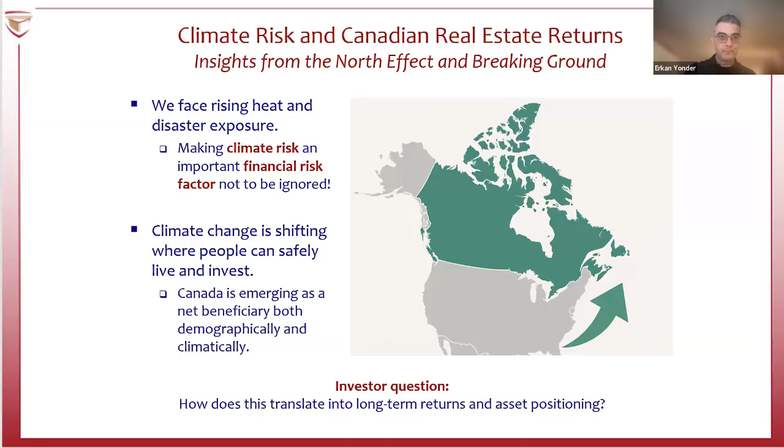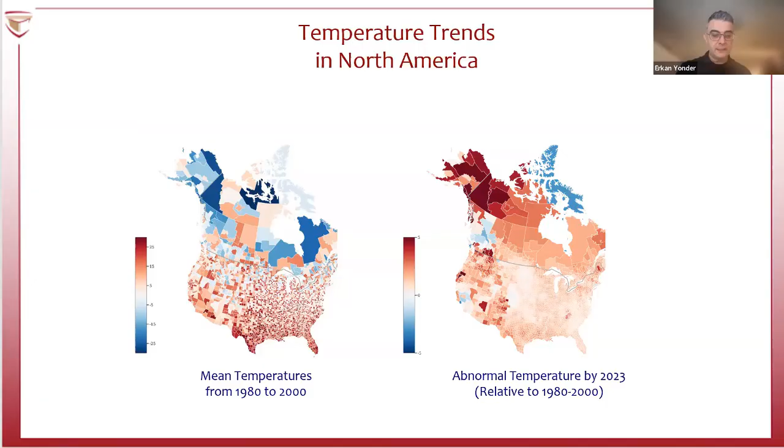So we see heating, and I've shown a couple of figures on how we see it. Let's discuss how this heating relates to more high-frequency disasters like flooding, hurricanes, wildfires, and so on. The important question for investors is whether we see any financial impact of these more frequent disasters.

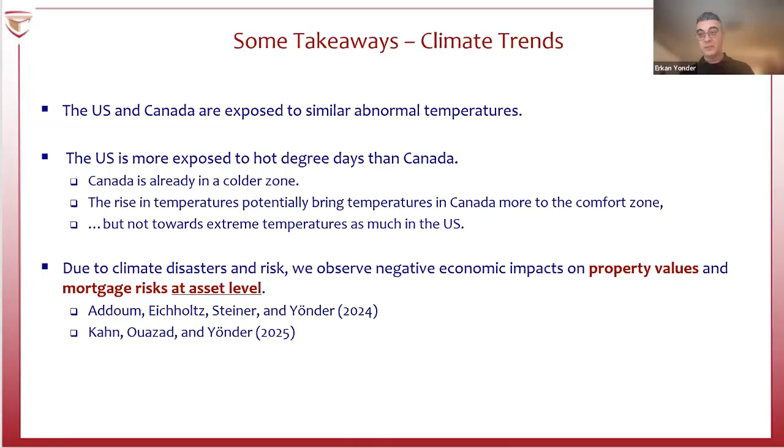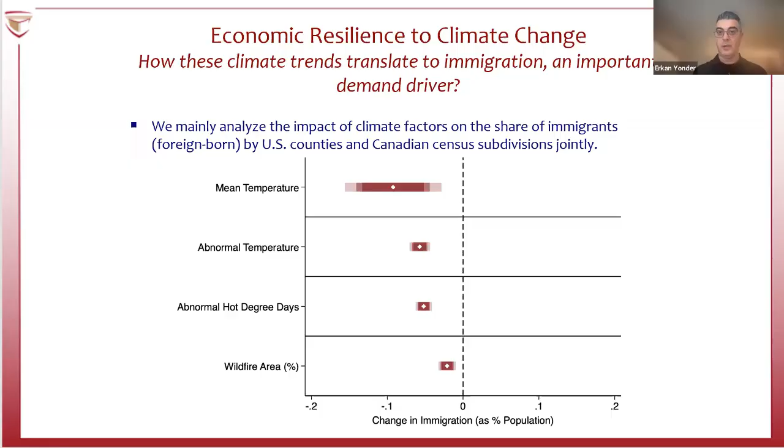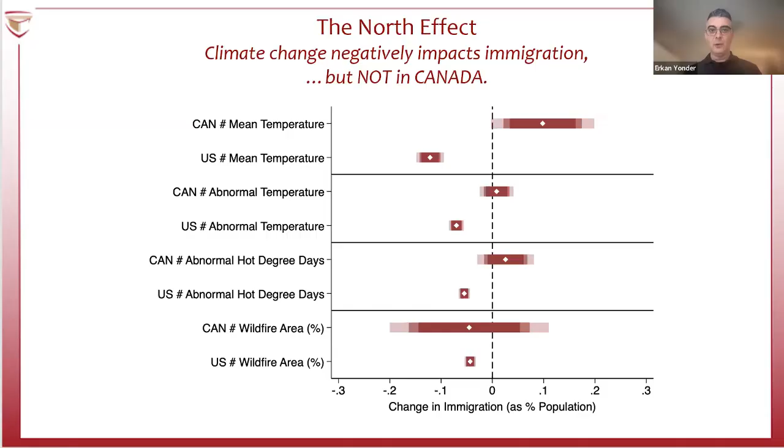But if you look at the Canadian bars, mean temperature is actually on the positive side, meaning that even heating kind of helps Canada attract more immigrants. And if you look at abnormal temperatures, hot degree days, or wildfire, they all cross the zero line, meaning these climate factors don't have any statistically or economically significant impact on immigration to Canada. So overall, climate change negatively impacts immigration, but not in Canada - we call this the North effect. So why do we observe this?

So why do we observe this? Overall, Canada has colder temperatures. We live in a colder climate environment. So the heating up in Canada brings those temperatures to more comfortable levels, kind of a North effect. If you look at the US map I first showed you, the US has lots of high temperature locations, and heating in those locations brings the temperatures to even more uncomfortable levels. So that brings in the impact.

Additionally, if you observe more heating and go to the extreme temperatures, there's a higher frequency of disasters like wildfires, flooding, hurricanes, and so on.

So if I translate these findings into where we should invest in Canada based on these findings: first things first, major metro areas like Toronto, Vancouver, and Montreal will continue to attract population and capital. There is no change with respect to climate. These locations are highly popular among immigrants, attracting immigrants from all over the world, and overall we don't expect any change. So this demand or climate won't negatively impact these locations' immigration, and the demand will remain stable.

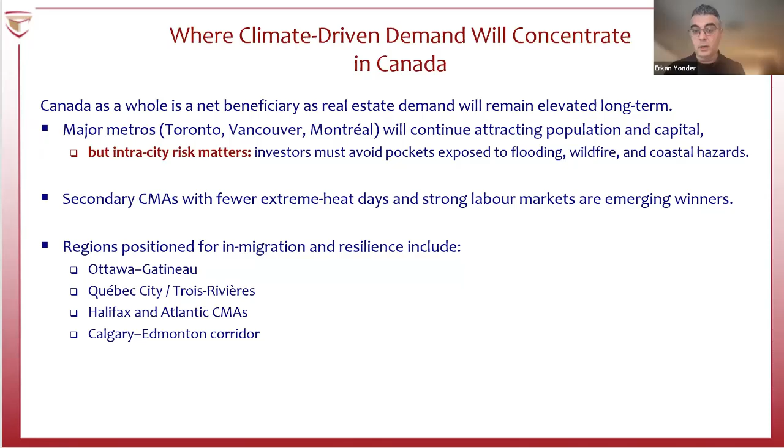And if you look at the economic part, all of the bars are on the left side, meaning Canada is also attracting immigrants from lower GDP countries. So combining these two findings, Canada attracts both climate immigrants and economic immigrants. This is really important because it represents economic resilience of the Canadian economy to climate change, and it's really important that Canada continues to have this advantage.

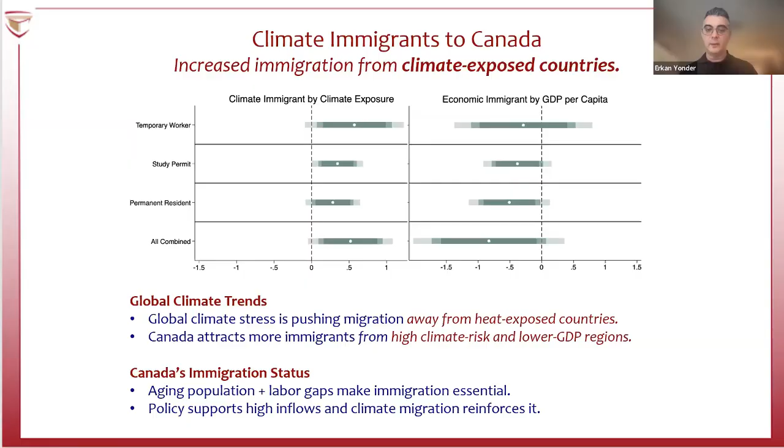But right now we see a different story in Canada's real estate markets, right? I think you might have questions about it. I made another presentation last week on this to some investors as well. Overall, the current structure shows declining GDP, rising unemployment rates, and the government paused immigration—I'll show you a figure of government projections. This has impacted real estate prices in Canada currently, so I think we shouldn't read the climate results independent of what's going on currently.

Next slide, please. I'll show you what's going on right now in Canada. This is the government's projections.

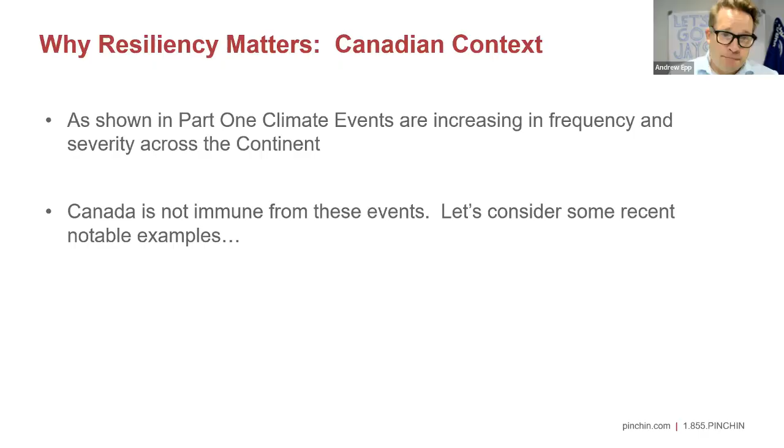This was 12 years ago. Rainfall of 126 millimeters over one day. Massive flooding, massive damage to infrastructure. We're talking closure of one major thoroughfare, transit systems down. That's the importance here. So, preventable—we'll talk. Next slide, please, Aaron.

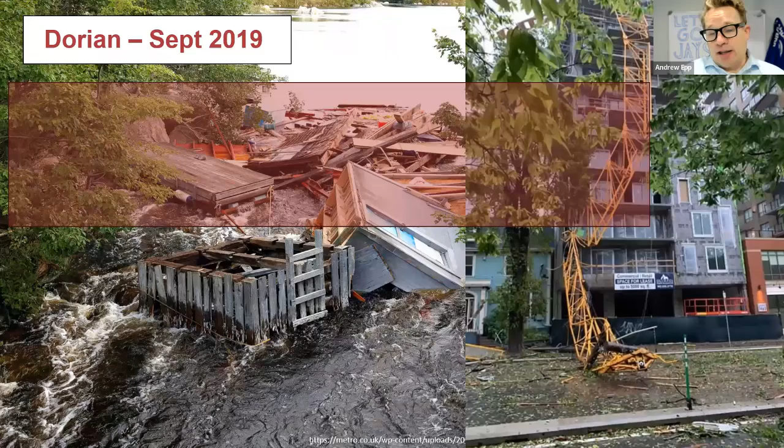Dorian, massive storm that impacted Atlantic Canada in 2019. Very strong winds, 100 millimeters of rain. Power outages—80% of Nova Scotia without power for over 2 days. $155 million of insurance claims in Atlantic Canada. Important note: insurance claims are not the total cost of the storm, only what people have gone after. My colleague, Mr. Runkle, will explain more about that shortly.

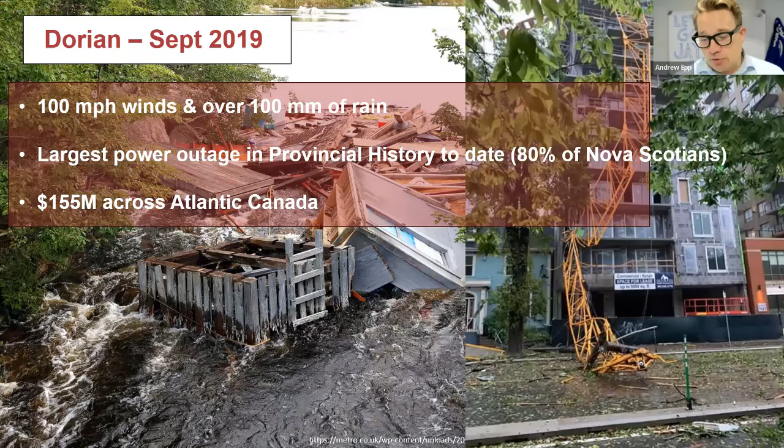So, ice storm was last year. Next slide, please, Aaron—a different type of event. And if you are a vintage like me, you'll remember the ice storm from 1998 in Eastern Ontario that plunged us into the cold for 5 days.

Next slide. Why does all this matter? All of these storms were meant to take you backwards, to remind you of the damage, the stress, the anxiety, the unpreparedness we had. These events are not getting fewer—we're actually expecting more of them. So while they are growing, so was our opportunity to lead in this space, as a country and as people within this industry.

Resiliency planning is no longer an option. It's essential for protection of your assets and the people in your care. We're going to skip that next question and go to the next slide—the resiliency versus sustainability slide, please, Aaron. And I'm going to pass it over to John Runkle to continue on.

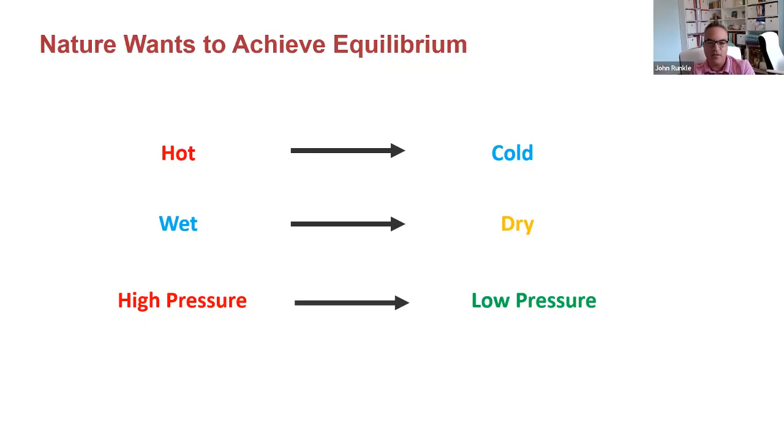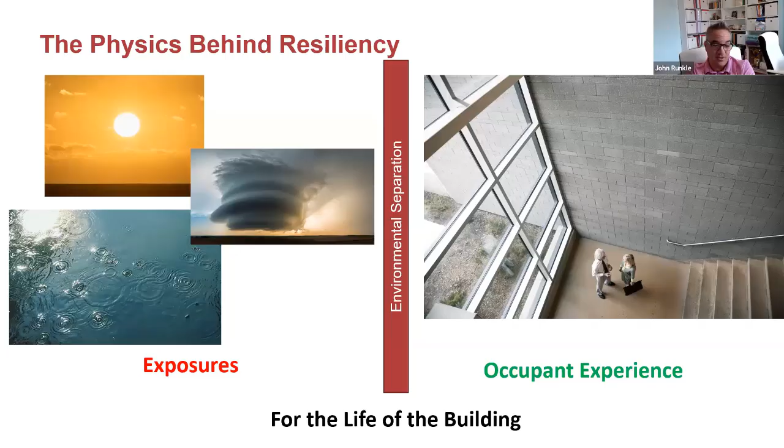So we put in walls and buildings and so forth to try to keep outside out and inside in. What we're finding too is that our occupants today are even more particular than in the past. I like to say that most folks have 1 degree of comfort level inside a building, and at any one time someone's always too hot and too cold. Next slide, please.

Andrew touched on this before, but we're going to talk a little bit about the difference between resiliency and sustainability. I think the one thing that's important to note is that sometimes, especially in the States, these can be political type terms. And I can tell you that natural disasters don't care how you vote. It will influence your property, it will influence your ability to live the life you want to live, regardless of how you vote.

When we look at resiliency, it's really focused on preparedness, recovery, and adaptation, whereas sustainability is more looking at the future and how to improve long term, given certain environmental targets and so forth. So simply put, the difference is while sustainability focuses on creating a positive future state, resiliency is kind of the pessimistic side of that—focusing on the inevitable disruption.

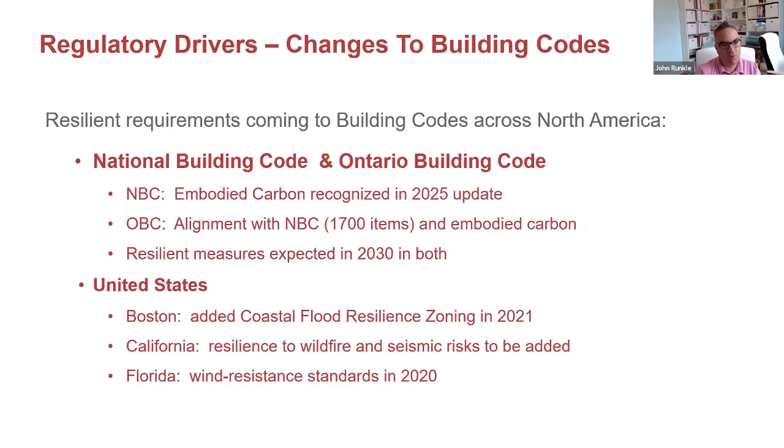In the United States, we've seen this across the states in areas hit hardest. A lot of times changes to building codes are influenced directly by natural disasters—we see that in California with fires and correspondingly Florida with wind. I'd say the biggest influence on our codes is natural disasters and responses to them, based on poor performance of existing buildings.

Focusing more on the dollar side of things, what we're really looking at is asset value retention. There are different costs—we'll talk about insurance in the next slide—but you can have uncovered losses, and you want to avoid climate-driven devaluation. We started to see some influence of climate change on property values in the first part of this presentation.

Now we'll look at how it can influence things after you've sustained an event. With regulatory compliance, local communities that have been hit may have additional regulations that cost real money to bring existing buildings up to compliance or prevent future losses. One of the biggest costs that's hardly talked about is the value of lost downtime from a facility expected to be producing revenue—instead it becomes a cost center until it's back up and running.

Focusing on the insurance side, which is a large part of our business both north and south of the border, you often see significant increases in premiums if there are multiple events, which can make or break the ability to pay leases—on the residential side, and impacting premiums on the commercial side as well. What we haven't seen yet is a direct linkage to mitigation and the reduction of premiums.

So what's at risk? Ultimately, in a lot of these cases, it's people's lives. It's much more than property or livelihoods, which are also at risk - but the ability to rebuild, business continuity, community and relationships, and just basic functionality. All of these things are at risk with these weather events.

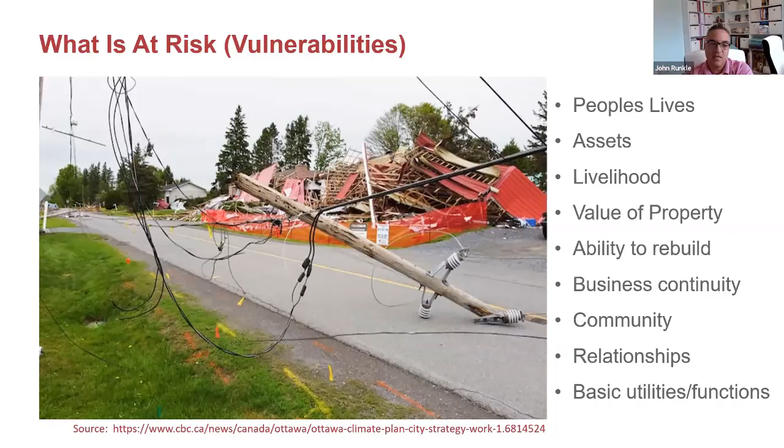One concept that I hope we can let sink in today is the importance of time. I think this was exemplified when you look at some of the fires we had in Hawaii as well as California, and some of the recent flooding too - oftentimes there's very little warning. When you overlay what's at risk with the limited time to prepare and get ready, it can be extremely concerning. The duration of the events is also important.

So how long you have to suffer - the downtime after the event, the downtime until you're fully recovered and back in, and then the amount of time that takes you away from doing the things you'd rather be doing. All these things are very important when it comes to these events and the time that you have.

It's shocking. Other things you don't think about too - when you're in this event, you're fully trying to react and get things done. I will say you're not thinking about taking pictures to document it. In my case, I wasn't thinking about where my car was parked, and by the time I realized it was at risk, I had no choice but to pull it as close to my neighbor's garage as I could, because I couldn't back it up into deeper water.

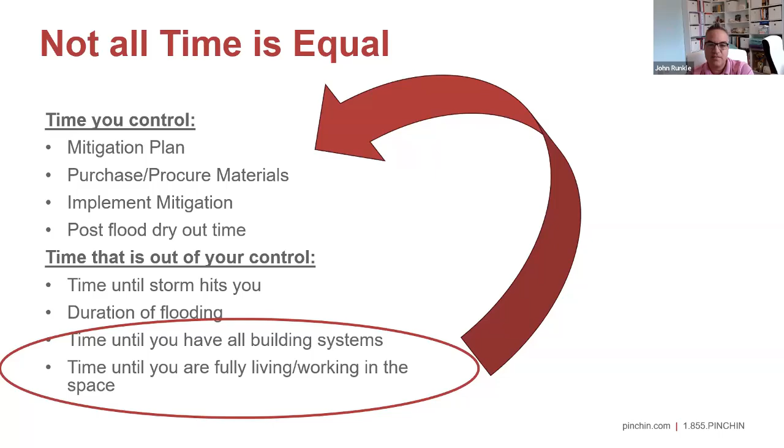We're going to give an example later on of one of the assignments we did that followed this new ASTM standard, ASTM E3429 - a standard guide for property resilience assessment. This is kind of hot off the press, but what this is, is a prescribed procedure to go through and determine not just what the risks are, but what opportunities there are to improve the results or reduce the risk to your property from a resiliency standpoint.

There are lots of tools as you get into this to help identify risk. One of the tools we've used effectively in Canada, and training we've received, is the PIEVC engineering protocol. This is very useful again for identifying risks on a site-by-site and location-based perspective, as well as looking at time - we know that risk exposure can change over time, and we also know that based on geography and other factors, the exposures are very localized in some cases.

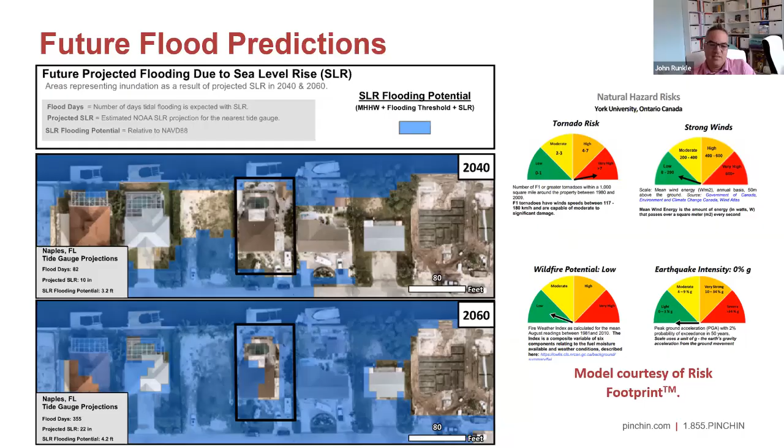When we talk about defining success, that's important. Anytime you have a property at risk, you have to first start with what success is. I think too often we get hung up on the success we see in the media.

One thing to talk about is whether you have insurance or not. But oftentimes when you're filing a claim, that's already failure—by the time you put in a claim, you've already lost, in other words. Things to think about: what are your deductibles, what's your damage, what kind of coverages do you have? A lot of the work we do is wind versus water, and if you only have coverage for one or the other, that could easily affect your financial risk to the loss.

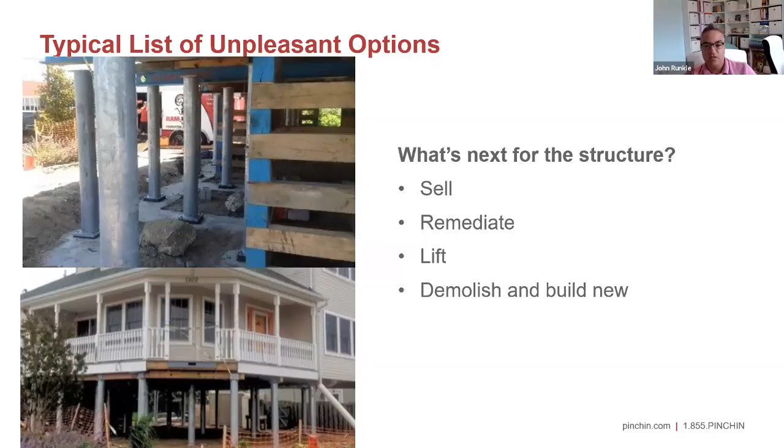If you have a loss, it's typically a whole laundry list of unpleasant options for you. In terms of flooding, which we're going to talk about today, you're either going to sell, do a substantial remediation, elevate your property, or basically demolish it and start over again. None of which are cheap.

So when we look at defining success, what we're trying to do is overlay a couple of different things: how much water is on the outside, how much water is on the inside, and for how long can we fight this fight.

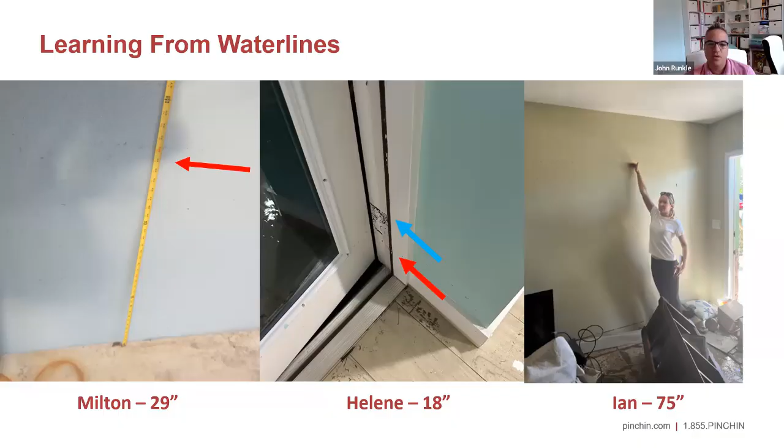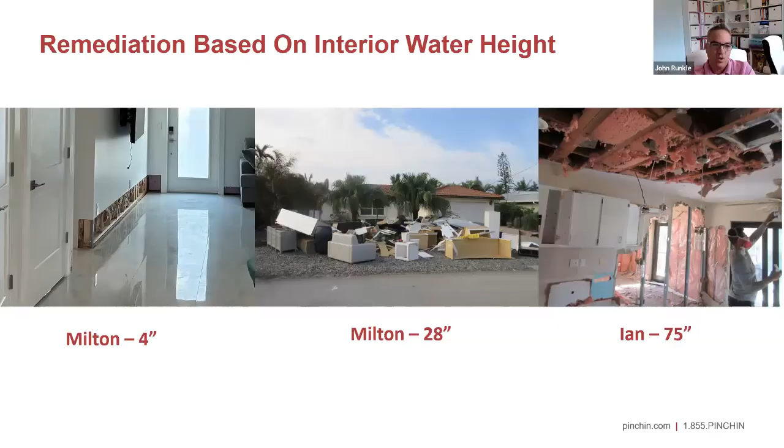This gives you an idea, from a residential standpoint, how much damage you can expect based on the amount of water inside a house. This is in inches, but a couple centimeters of water and you're going to cut out about 30 centimeters of drywall. When you get up to about half a meter, most of your contents, appliances, and your house end up on the front yard. And when you get into the 2 meter range, pretty much, if your house is a single story, it's essentially gone. So what do we do with this information in terms of defining success?

Next slide, I'll turn it back over to Andrew. Thanks, John. All right everyone, so that's been an hour of lots of thought, plans, theory.

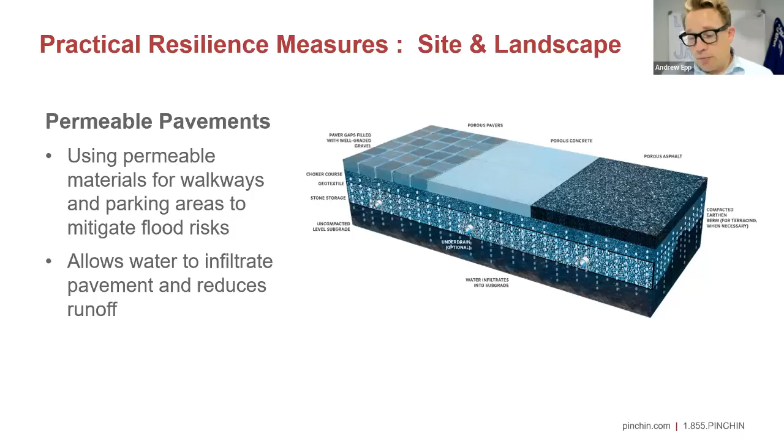You'll see often that these are generally more upfront - obviously this is quite a bit more expensive than a typical repave. However, what we want to do, as John did a really great job explaining, is balance the cost here versus the cost of the flood that we haven't tried to mitigate, or even allowed to happen because we just went with a straight asphalt. Next slide please, Aaron.

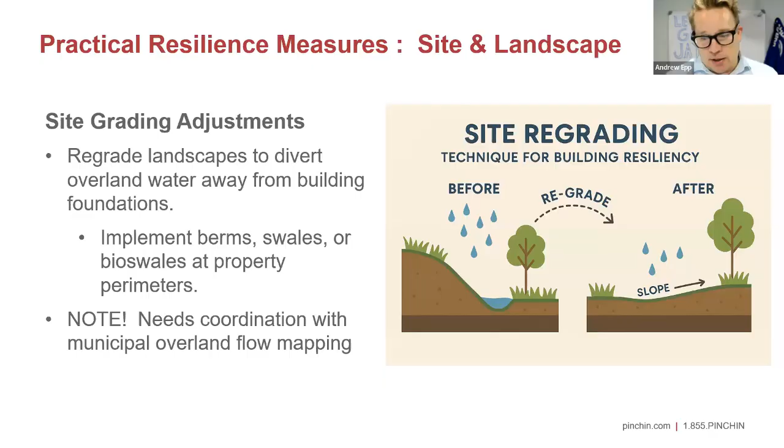If you're going to consider this, it's not massive - it doesn't require a lot of big equipment, but its impact is really quite good. It's very important to consult with the local building department. They certainly have a flooding plan, and you want to participate in that, not contribute to it. Next slide please, so that was some ideas for site grading.

So it is a solid layer, basically like a raincoat around your property.

Sorry, that's not me. Sorry.

So the weeping tile is the same idea. We've got a protective skirt, right? You can see that black layer around the building. And then the water itself, in typical waterproofing, we just allow it to flow to the groundwater. Here, we are directing the water. You can see that pipe right at the bottom, that is the weeping tile. Same idea as a French drain. So we have a tube in the ground, it has holes in it, collects rainwater, and once again, moves that to where we want it, not where we don't want it. Next slide, please, Aaron. Another envelope one.

If you have been in a neighborhood with a flood, or in a community that's had it, this happens often. I'm broadcasting from near Sarnia, Ontario, where we have a neighborhood that has experienced really bad flooding, and this has happened a few times. The storm sewers become overwhelmed with so much rain that the water will push out and come back into someone's home, along with some other rotten things, here depicted as rodents, because this is a polite environment. But the rodents, plural, and all their other bad things come back into your basement, and that is not a good situation. Backflow valves are great for everybody, especially in flood-prone areas like the Don Valley Parkway that I showed you before.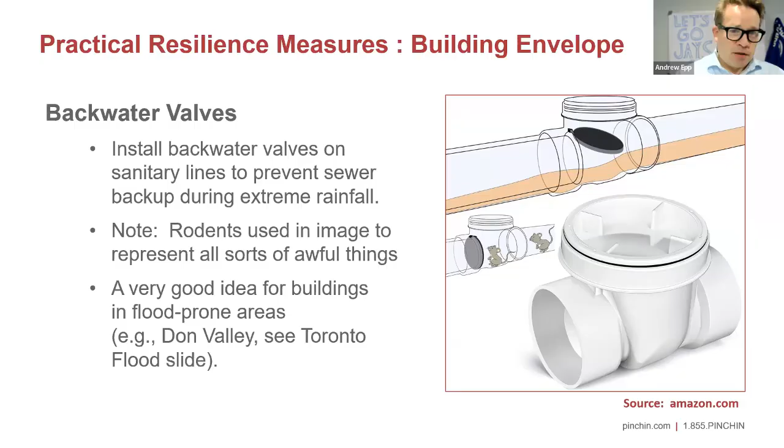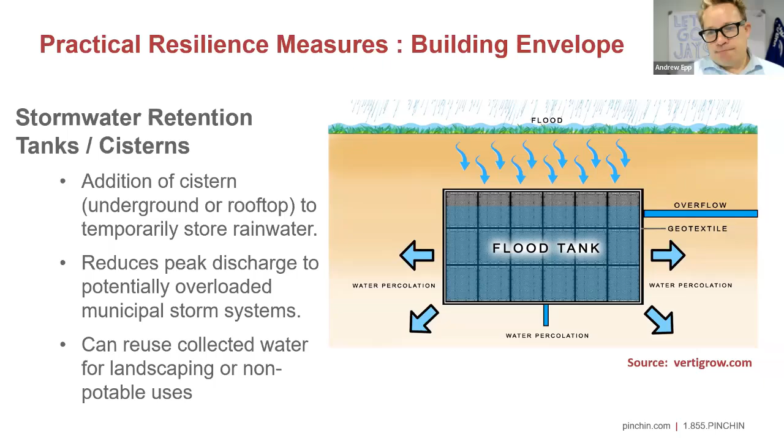Next slide, please. This one's phenomenal. The stormwater retention tank, or what I learned the other day, sometimes called the detention tank. Same idea as the weeping tile, a big tank buried underground to hold the flood water from your property. We're prone to flooding if we're in an area where we can't get it to a sewer line easily. This is just the mid step. So we fill the tank during a storm, and then you can see the tank empties slowly, with I see 1, 2, 3, 5 ways out of that tank. So some to the sewer, and we leach it slowly to the ground, controlled. Next slide, please. Those are some examples.

If we're also looking at, if it is time to do windows or doors or any type of exterior, there's always some things to consider. I think it's probably worthwhile mentioning that every building retrofit absolutely has both a sustainable component and a resilient component. For building envelope retrofits, we probably should ask the technical people involved, if we're doing insulation, what types are available, not just accept one. You don't have to be a building engineer to know this, but ask, what are my options here in terms of cladding and insulation? Should we be focusing on something that's more moisture resistant, considering where we live?

Storm surge and wind resistance enhancements. If we've seen a lot of wind events in our area, there are other building retrofits we can add in to make sure the roof stays put, that rooftop equipment stays put.

Next slide, please, Aaron. Moving into mechanical electrical, this is simpler stuff. These are both photos from John's property in Florida. Real simple, and we all know this: electrical machines, anything with electricity, doesn't work well with water. So what do we do? If we're looking at a mechanical room, if we're in that kind of project where we might be replacing a pump or a motor...

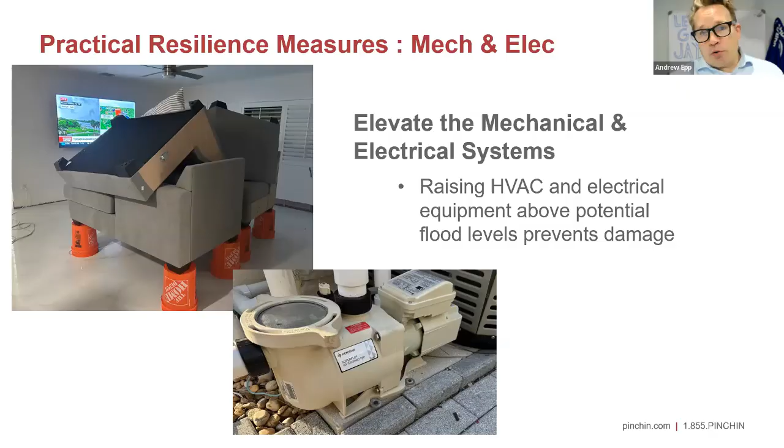Put them on a pad, a housekeeping pad. Not a ton of extra money, a few extra thousand dollars, but raising it off the floor 4 or 5 inches will save it in the event of a flood. You can see that's the pump at the bottom. The classic one, I think we all grew up with this from 80s movies and cartoons: there's the furniture, and John uses the best tool engineering has ever provided, the Home Depot bucket. So his furniture is up, probably not quite a meter, but there it is off the ground. His furniture is protected, the floor might be damaged, but it's good seeing this section. We're good to go. Next slide. Also absolutely worth considering, if you don't have it, whether it is residential, commercial, whatever you have.

Backup power. Here I show you 2 examples. On the left, that's a home-based generator. You can see it's on a pad outside. It runs off of a different fuel than electricity, so this one's probably either diesel or natural gas. You want a separate fuel that isn't tied to the grid, and that can give your building either life safety power or full backup power. That's up to you to decide.

On the right is the style we have here in Southern Ontario, many homes, and that's just a portable gas powered generator. It is very, very loud. It provides me with maybe a half a dozen outlets, but that provides 3 teenagers with their phones during a blackout. So that's a good balance.

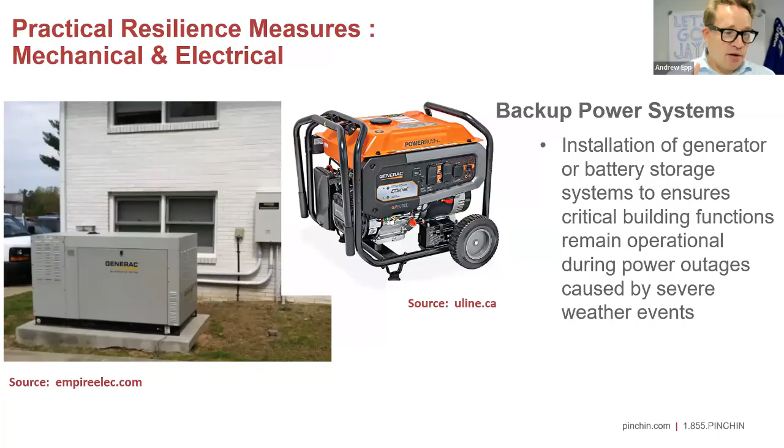Backup power in a larger scale - if you are a property manager with a larger multi-residential building, you probably have one already. Absolutely important. We're going to talk about the importance of looking after your tenants in a minute.

Next slide, please. Just another couple quick comments about other features you could add if you're looking at a project. And because I'm a bit of a smart aleck, let's talk about being active with passive design. There are things we can put into a building or in a project that are not functioning machines, but they're strategies that could, in the event that we've lost power, rely on the earth to do some things.

It's like cross ventilation. Can we put in vents across the building so I could open one and allow air through rather than if all my windows were closed up? Glazing on windows - glazing is a very important in-depth topic. I know it doesn't sound it, but considering what you're doing window-wise is always a great idea.

Adding trees, expanding the tree canopy, always a phenomenal idea. Trees, the most natural source of cooling ever. They give us shade in the summer. They can help drink up some extra stormwater. And many municipalities, like the City of Toronto, City of London, have funding for you to access to add those trees. So if you're doing a project and it's underway, they won't just buy the tree for you, but if you have a project, you can solicit those funds and they will do that for you.

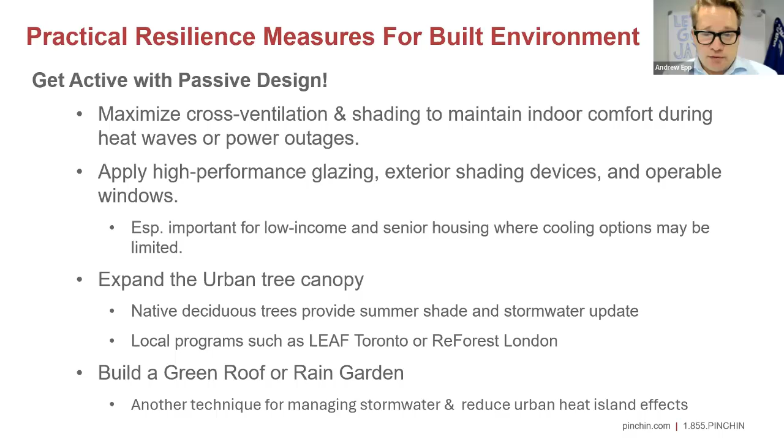Next slide, please. Final thought on the resilient measures. So I've talked all about the actual brick and mortar. Resiliency means we've talked about protecting assets and your community. It means looking after your people as well. A new building - I used to work for the City of Sarnia for a period of time.

Our new capital facilities we were opening always had a consideration for emergency cooling centers, emergency shelter spaces. I imagine most of us received our COVID vaccines in a hockey rink, beds lined up, right? So that building was converted to use it a different way. So we want to think about that too - here's my facility, how could we use it in another way to keep people safe? Parts of the community, maybe not in our tenants, but others.

So that means, what emergency power do I have? How do I keep this cool? How can I keep our people in touch with the rest of the neighborhood or the rest of the community? And then final slide for me, Aaron.

Considering the people in your care, an engagement program, an information program, even just a newsletter, an email blast - so this is what we're doing resiliency-wise to let them know what exists is a big deal. Get those people, your tenants, your renters, whomever, involved in the planning as well, because they may have to live that plan when you are not around.

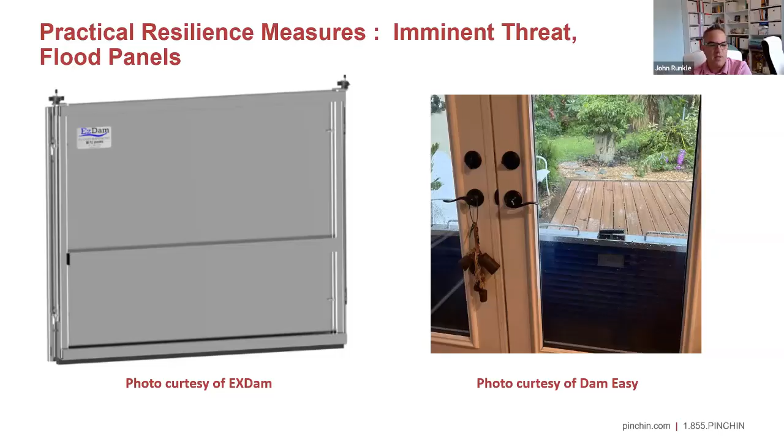Now they make different products, and we're not pushing any manufacturers here. Some of them are kind of stackable, where you can go up to higher elevations.

But there's a couple other things, and Andrew brought up a great point about always being mindful of the tenants and occupants. What we've seen in Florida is there's a very difficult permitting process if you want to do flood mitigation, because at the same time you need to keep the flood out, you need to make sure that you maintain egress from the building or residence, whatever it may be. And that can be very difficult. For example, how do you get a wheelchair past this opening? These are all things that must be well thought out and planned for as you're devising your mitigation strategies.

So the invention moment for me came where I realized that I was not going to be able to keep all of the water out. I realized this during flood number 2, when I was inside the house and saw that the leakage was not coming from the windows and doors where you would think it would come from. It was coming from somewhere else, and I have no idea where, like almost permeating up from the slab.

So most of us are familiar with the sump pump. I doubt many of us are familiar with having a sump pump on your first floor, or in your living room in this case. But when you've got to do what you've got to do, you can put a sump pump in, a float valve on it, perimeter drainage that drains into your sump pump, and use this as your backup. Now you want to make sure you have a way to supply power, and some of the generators Andrew showed are integral to this process.

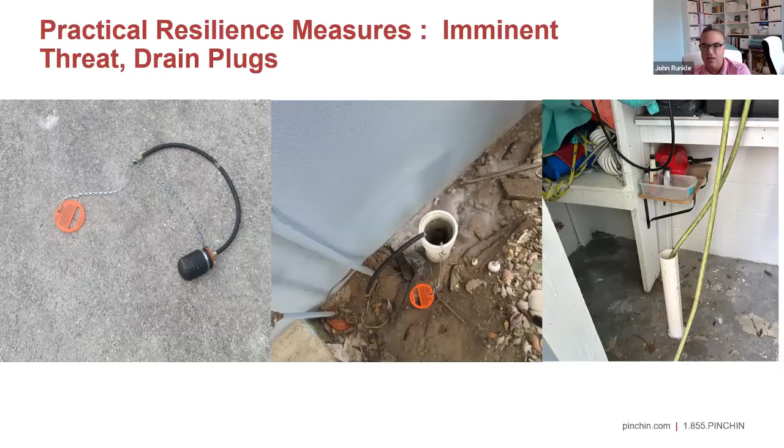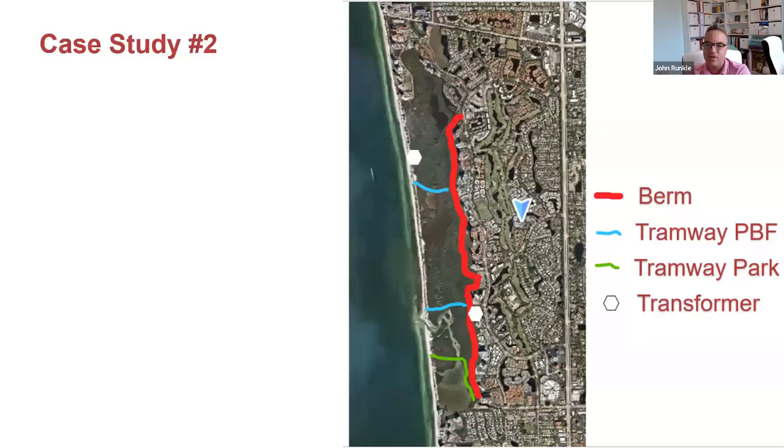The second case study I want to show you is a commercial property, about 16,000 people live in this commercial property in Naples. It was an interesting property because they had this raised elevated walkway that ran for over 2 miles. The thought was, could we turn this elevated walkway into kind of a dam or dike so that we could protect the thousands of people that lived inward of that from flooding events?

Well, it was a novel idea, but there were several challenges with that, notwithstanding the fact that there were holes, and as you can see, examples of some weirs where they allow the fresh water and salt water to communicate through the walkway.

But the biggest challenge had to do with the community and the egress. The fact was, when we did a LiDAR survey, what we saw is that the local community and the main streets for that community were at the same elevation as the areas we're trying to protect around the side of the berm. So you can see with the big blue arrows, we had these incredible flanking flow risks, where water could just flow around our dam even if we were successful at keeping the water out. In other words, there's no purpose to turning this 2-mile long strip into a dam unless we could also work with the city and community to raise the street up to at least the height of the walkway to turn that into an effective dam.

So we're still working with that community on that aspect of it.

And this is the same community. In the PRA, we identified these 2 buildings. We're showing one of them here. These are coastal restaurants on the other side of the elevated walkway, right on the beach. These communities, these 2 restaurants, have been hit hard with storm surge to the point where there was almost 3 meters of water in this restaurant.

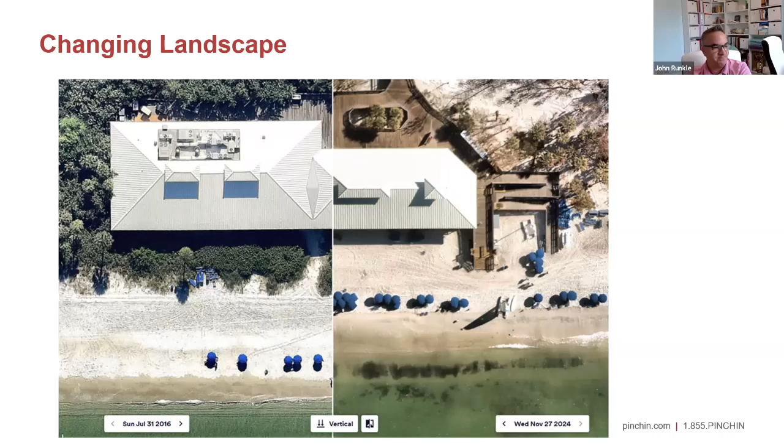Great, thanks John. Everyone, 5 more minutes. No problem, I thought the same thing, Aaron. Give me 5 minutes and we'll get to your questions right away.

Let's talk about some of the lessons we've learned, pitfalls to avoid. Next slide, please. I think we've made a very good point: we cannot underestimate the power of storms, the importance of time. Water is very, very strong, and it will do its damage all at once. We've seen many, John and I and our teams, just people misunderstanding when a flood peaks, what water can do.

Probably the biggest lesson learned our team would share with you is that the mistake people make is assuming they have time, and John showed that real well. Once the storm has happened, you're out of time. So working on these things today, when it's not stormy, when you have time to think lots of scenarios through, that works.

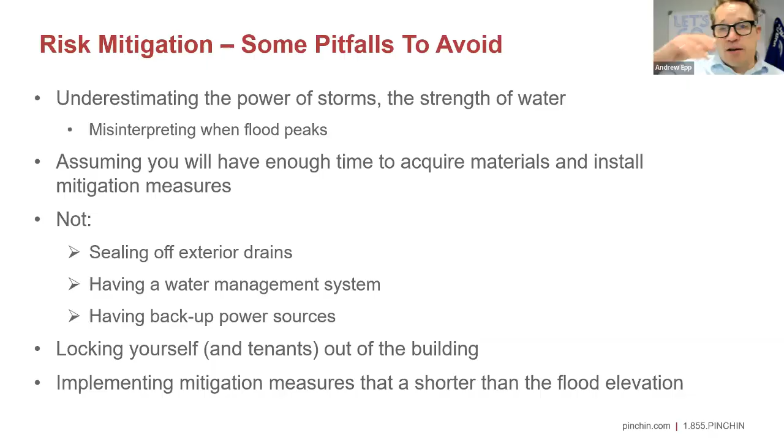Some more, right from John's presentation: make sure drains are sealed off, make sure you have a plan to manage excess water, have backup power, do not lock yourself out of the building - that's a story for another time from John - or implementing measures that are just not sufficient, like a flood panel that is just not tall enough for the amount of water.

Next slide, please, Aaron. Our biggest, or probably most succinct lesson is don't be overconfident. Taking no action to protect your possessions and your property is just a recipe for disaster.